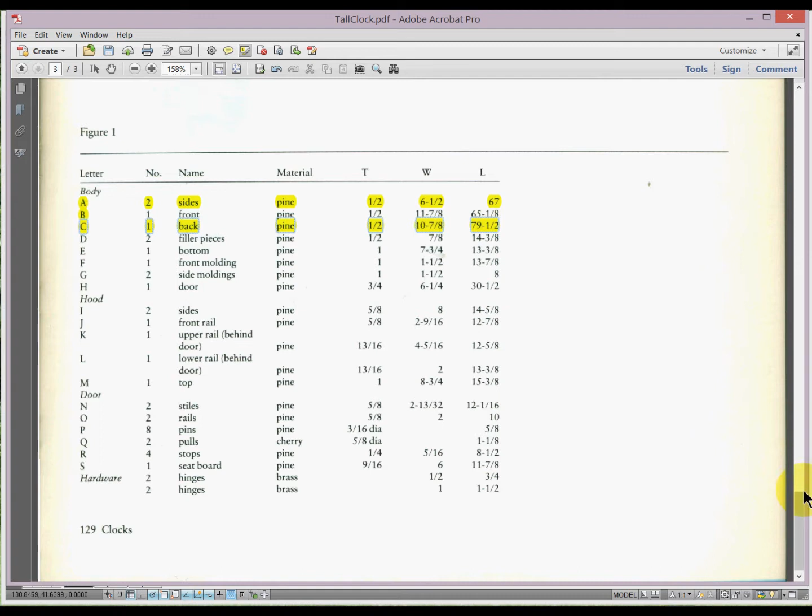I'll go ahead and mark this off here. So as I go up here, let's go ahead and look at B. And there it is, B. I can zoom in if I need to.

So I'm looking at B, and I notice that there's a door, which means there's a cutout, and it actually says there's a door opening, which is 6 inches by 30 inches. So first let's build this B.

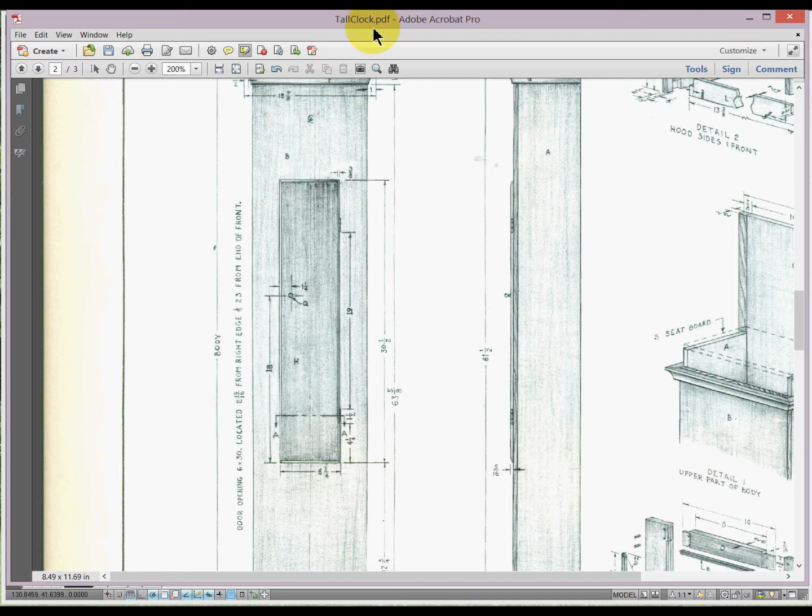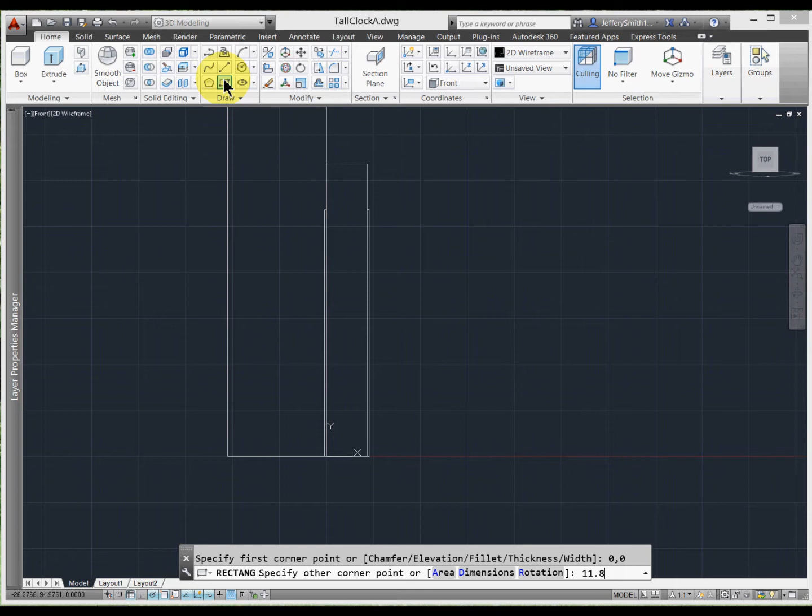So we'll go to the front view here. And I'll take the rectangle tool. I'll start at 0, 0. Press enter. And then let's go ahead and build it at 65 1/8 inches by 11 7/8, which is 11.875, comma 65.125. And then press enter.

And then let's go ahead and extrude it. I can select it from the ribbon above, select the object, press enter and type in 0.5.

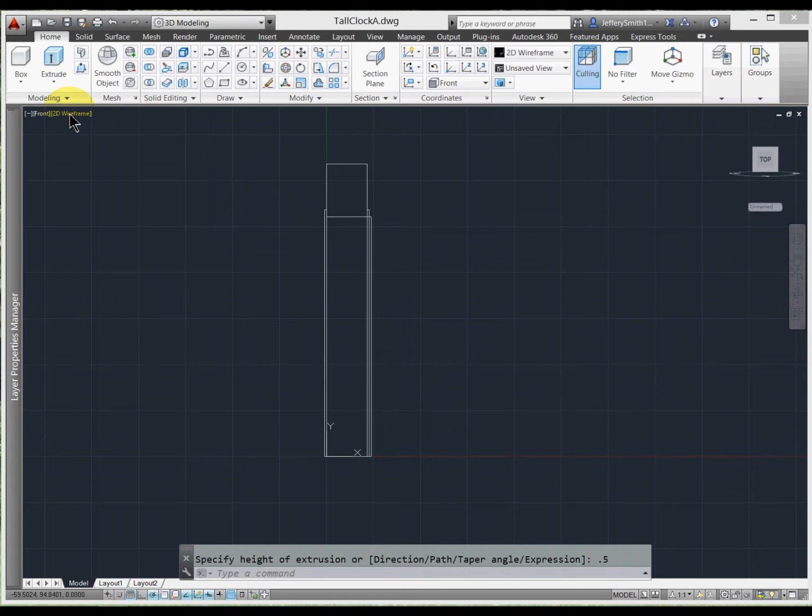Now I know that this isn't centered, so let's go to the 3D view here. And we'll go to the isometric, and let's just move that. Now if I look at the PDF file, it is in fact resting on front of the side here. So we see that half inch, so it isn't embedded inside of it.

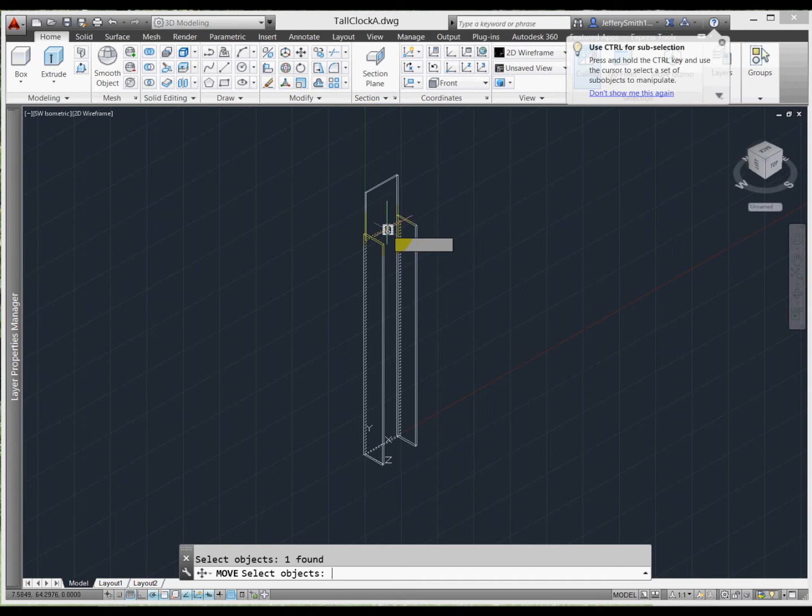So we'll go ahead and type in M for move. And we'll select the object, which is the front, press enter. Now it's hard to see, so I'm just going to zoom in, and I'm going to put the corner right on top of there. And let's inspect that.

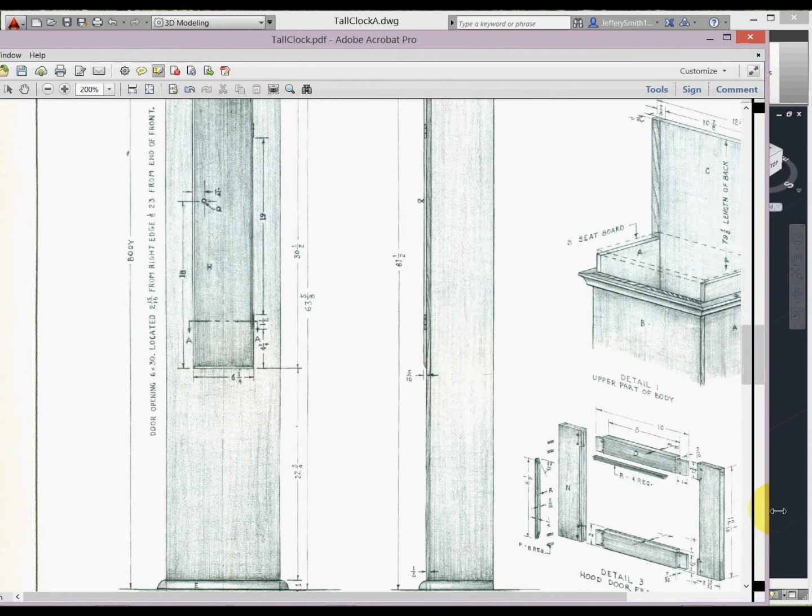We'll go to the shaded with edges. Now you notice that the top actually is not covering, so let's go ahead and look at that detail and confirm that is the case. And so there it actually is. So we see that, so it looks fine.

And let's go ahead now and we'll deal with this cutout piece. So let's go to the front view. And let's go to the 2D wireframe again.

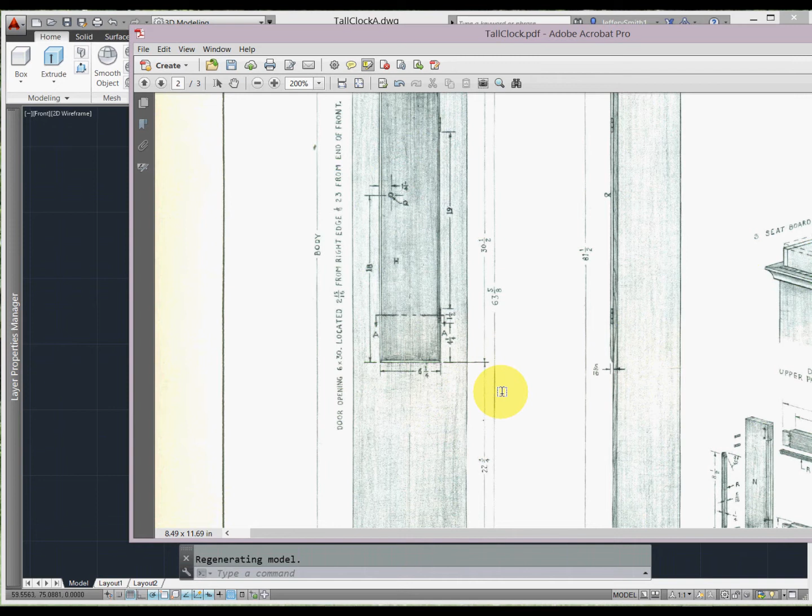Now it's telling us, if we look at the PDF file, that there's a door opening that's 6 inches by 30 inches. But it's also telling us that it's 2 and 13/16 from the right edge and 23 from the end of the front. Now I can look at this drawing and pretty much determine where that is.

So let's go ahead and we will construct that. That's 22 3/4, and that's the door that's overlapping here. So here we go. Let's go to the front view.

And what we can do is build the door first, for the opening, at 0, 0. Enter. And then it's 6 1/4 by 30 1/2. So I'll type in... I'm sorry, the opening is 6 inches by 30 inches.

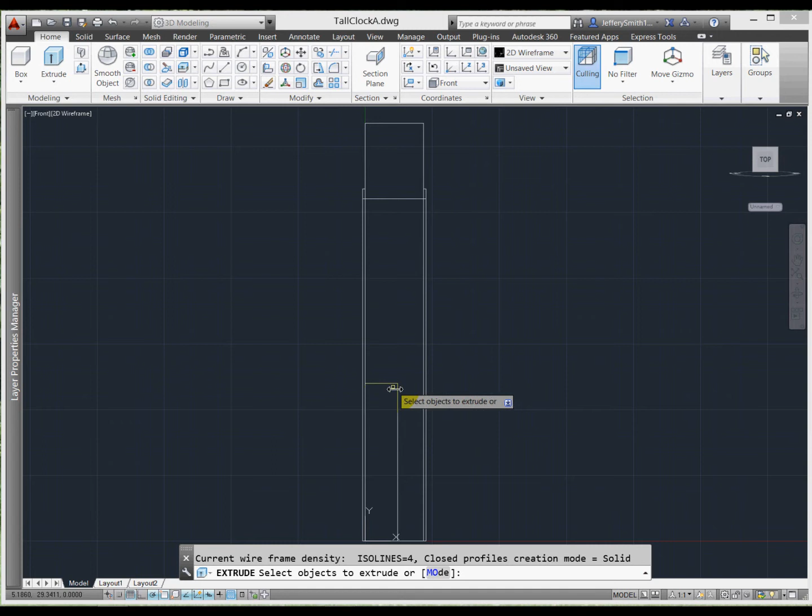Press enter. Let's go ahead and extrude that. Select the object, press enter, and it's 0.5 inches.

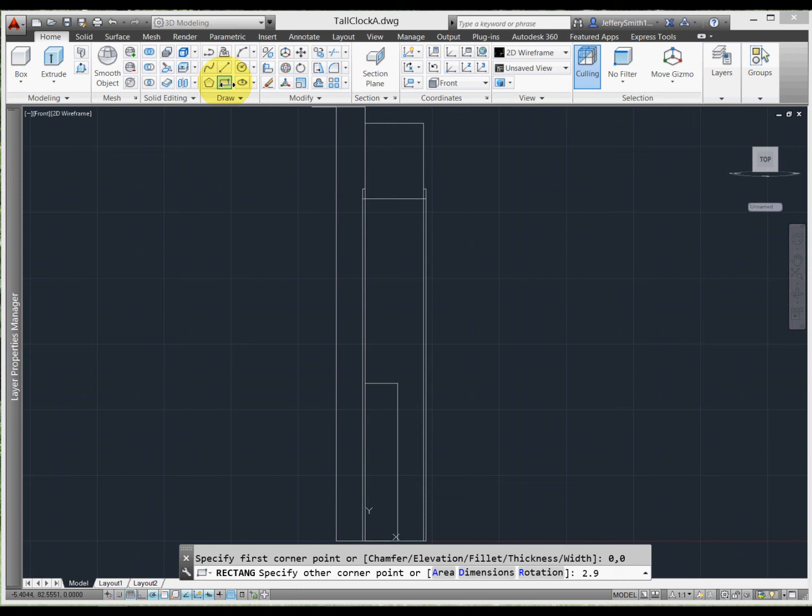Alright, so let's go ahead and we need to build a little template here. So what it's told us is that the template is 2 15/16 from the edge. So let's type in 0, 0, and then 2 15/16 is 15 divided by 16ths, which is 0.9375, comma, and then it's 23 inches from the bottom.

And there it is. Now, having constructed this, I know that that is at the back. So let's go to the 3D view. We have to move that all to the front. So type in M for move, select my little template here, and it says it's from the right.

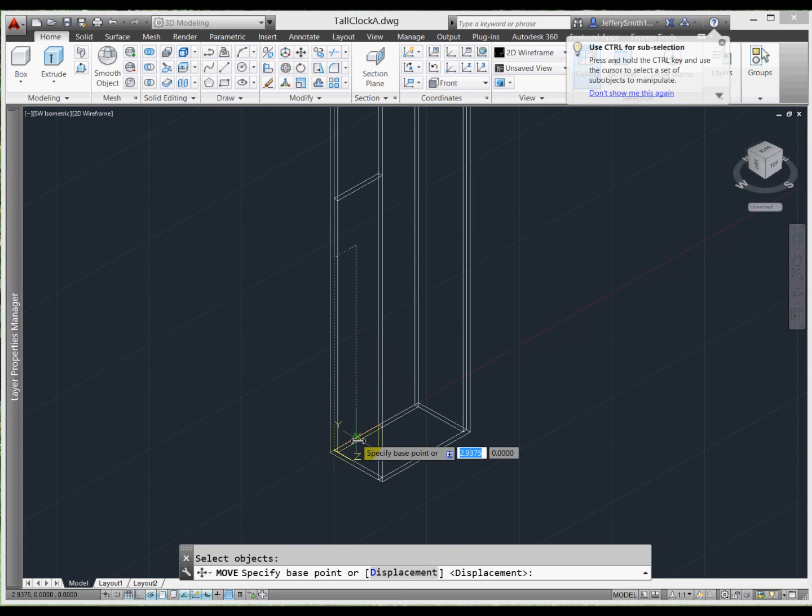And then let's go ahead and move the opening. Also, a little tricky here, but you want to make sure that it's embedded inside of it. And so I can determine that by going to the shaded with edges, and I can just see it there. But let's just be sure.

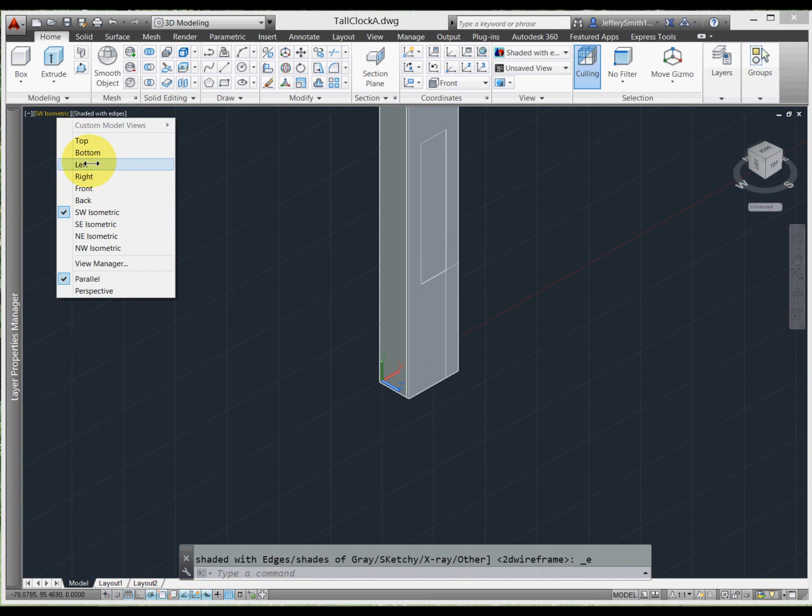So let's go to the front view, and let's go to the 2D wireframe. We want to make sure that it is actually centered. So I'll simply type in mirror, select my template here, press enter, and I'm going to select the bottom, and there it is. It's perfect.

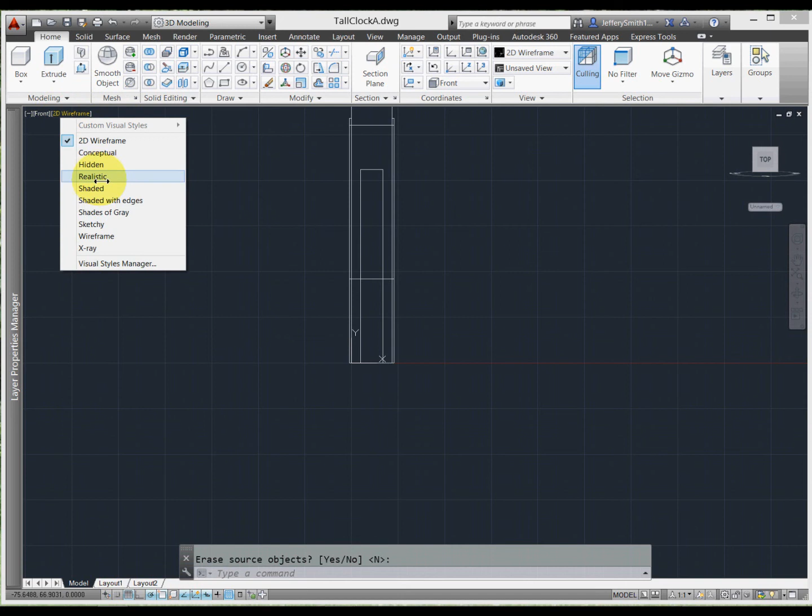All right, so let's go ahead and subtract this object. So let's go to 3D, shaded with edges and the isometric, and I'll zoom in here, and I can either go above on the ribbon and type in select subtract, or just type it in.

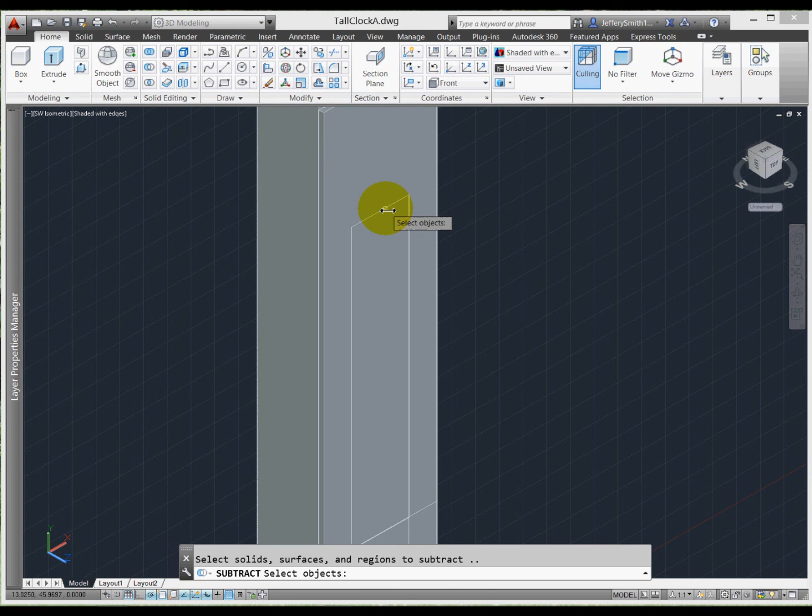The first thing we do is select the object we want to keep, press enter, object we want to remove, which is this area here, and press enter, and in fact it is gone. I can inspect that with my orbit, make sure it's gone. It is gone.

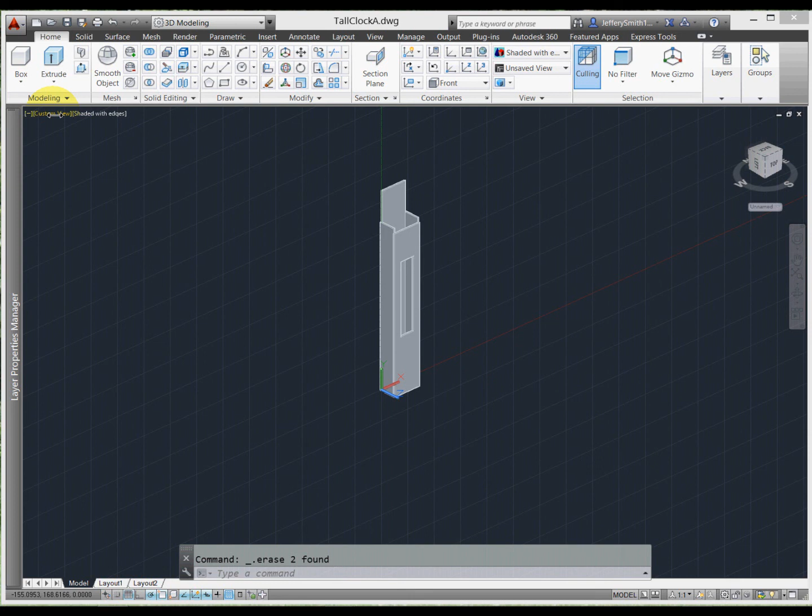All right, and let's go ahead at the same time here and escape. Let's get rid of these little lines here. So we have the cutout done, but now we actually have to put the door on. So in order to do that, we're going to have to take a look at that PDF file.